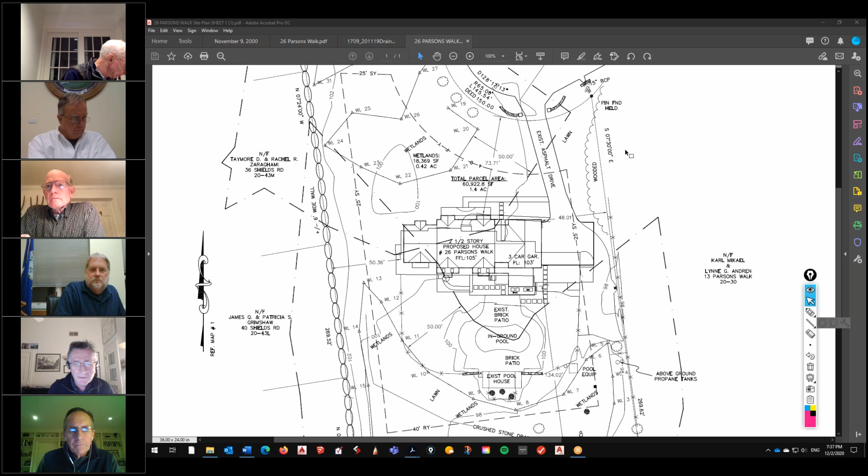I think I can. You're the new presenter. Okay. Can everybody see the screen? Okay, so I'll give you an overview.

Here is the site. It's at the end of the cul-de-sac at Parsons Walk. And here is the existing house. This is where the house is.

There is an existing pool and a pool house, about here, which we're going to keep. The wetlands are mainly here and also here.

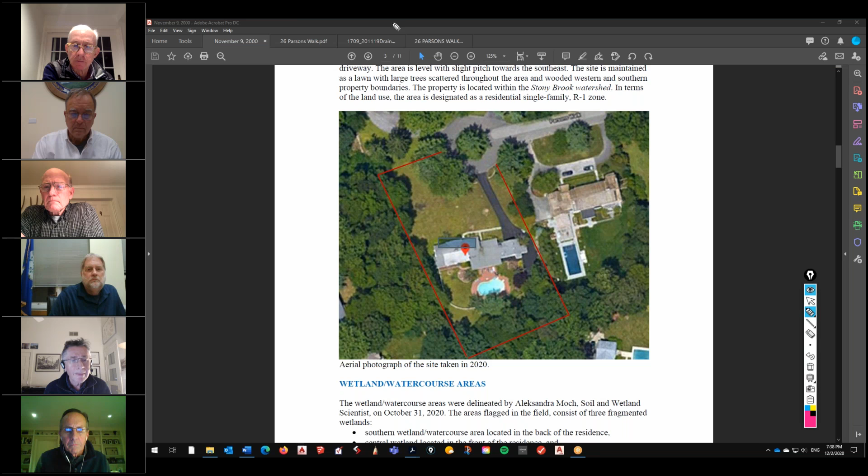Here is the view of the site and proposed house. It's basically a replacement house. I'll show you this, this actually shows it better.

So here is the edge of the wetlands, and here is the edge of the wetlands. With the offset at the 50-foot mark, this only leaves this area here, which is outside of the upland review area. So our proposed construction is mainly where the existing house is now. This is the existing house right here, kind of meandering like that. And our proposed house is just in the same vicinity, as you can sort of see it here, with a smaller footprint and smaller driveway.

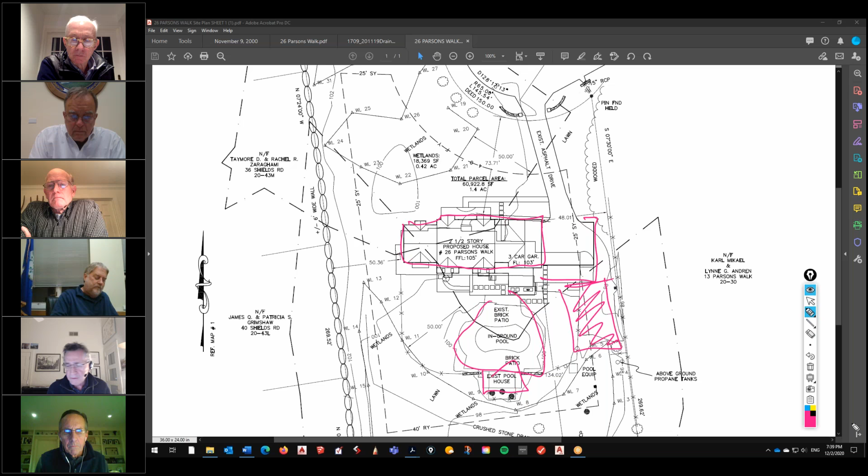There is an asphalt driveway here, which we're going to take out. We are going to keep the pool and the pool house. The drainage area for the proposed new house is going to be here in front of the house, and then behind, you can see it here and here. This is the proposed drainage.

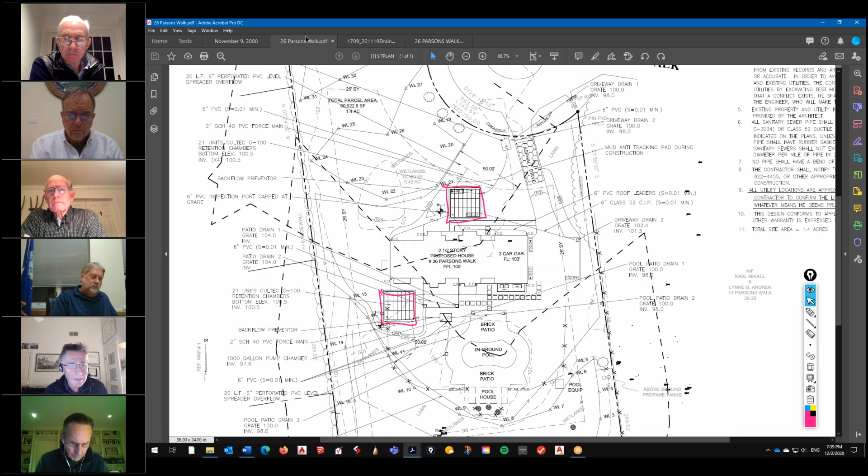In terms of mitigation, we have Alex, who's actually here in case you have any questions for her. But there is a report that I'm going to submit. This is the mitigation plan in terms of plantings—some plantings here in the front, here on the edge of the wetlands, and a little bit here and a little bit here.

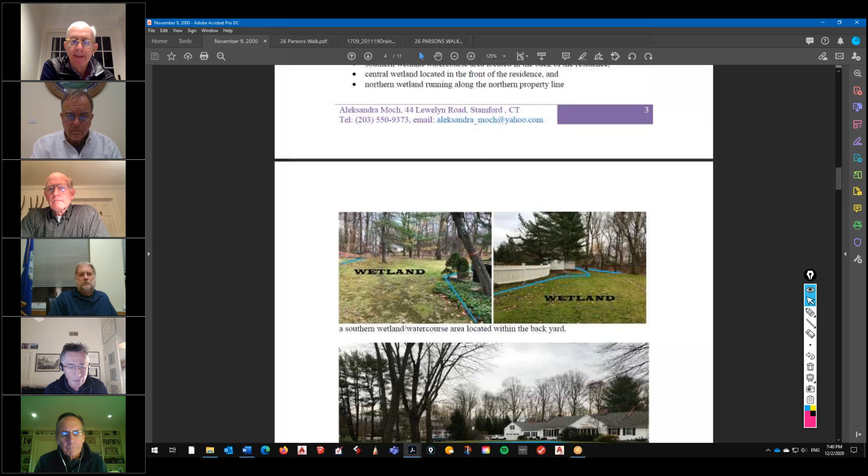This shows also a few pictures here on the site where the wetlands are. You can kind of see that this is not really much grass. There's mainly grass here in the front of the house—this is the existing house right there—and some of this here on the side.

And again, I'll have Alex at the hearing go over her report. The drainage design here was done by Wayne Davanzo, who's not here tonight, but he's going to be present at the hearing next, I guess in January.

I don't know if you have any comments or questions. I'll be happy to spend more time—I was trying to be very, very brief.

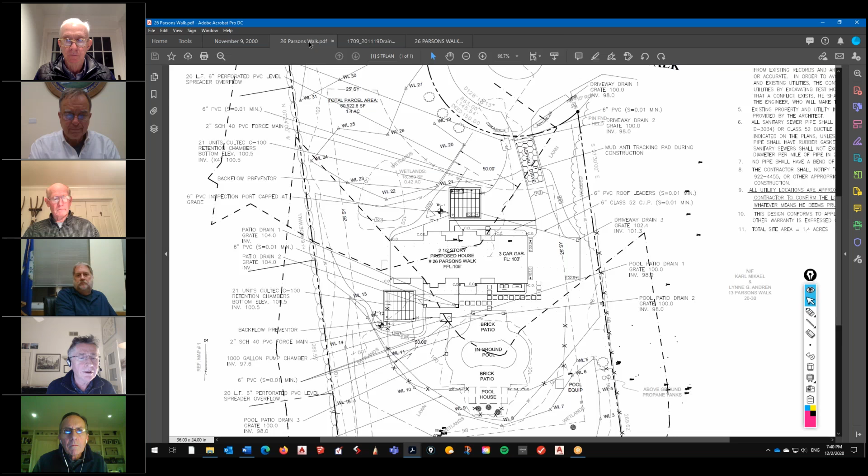Sure. During the meeting in January, you'll have run perc tests? Well, the perc tests have already been done. There is a—because of the design, you can actually see it. Here are the test holes, here, here.

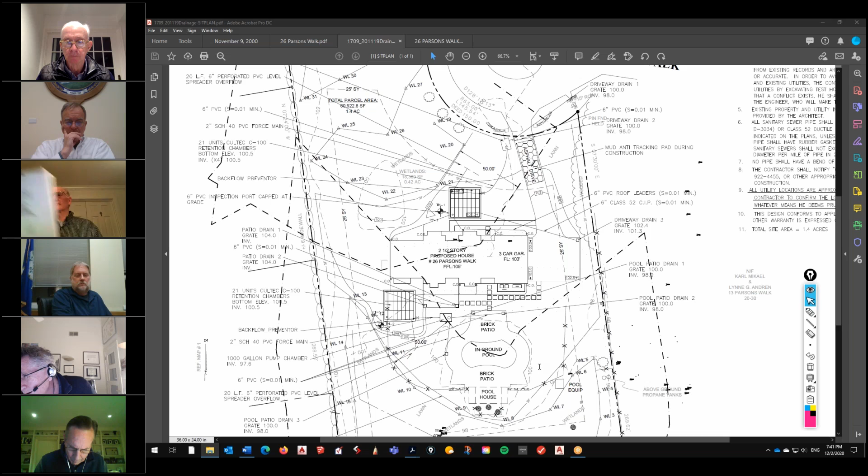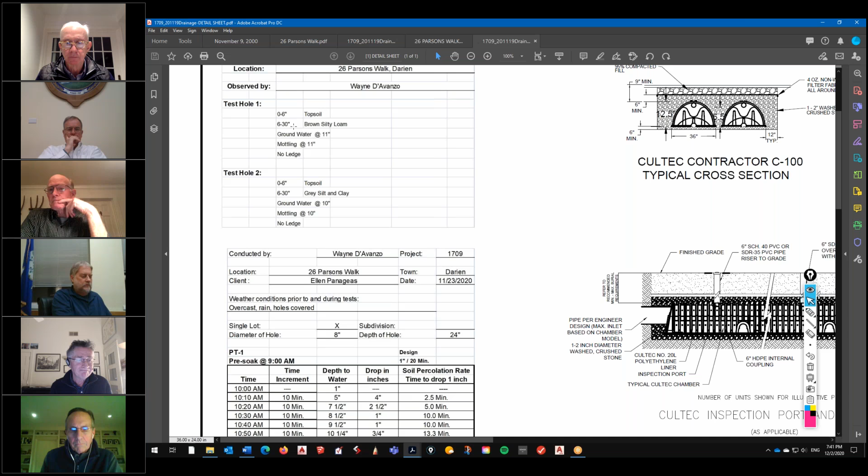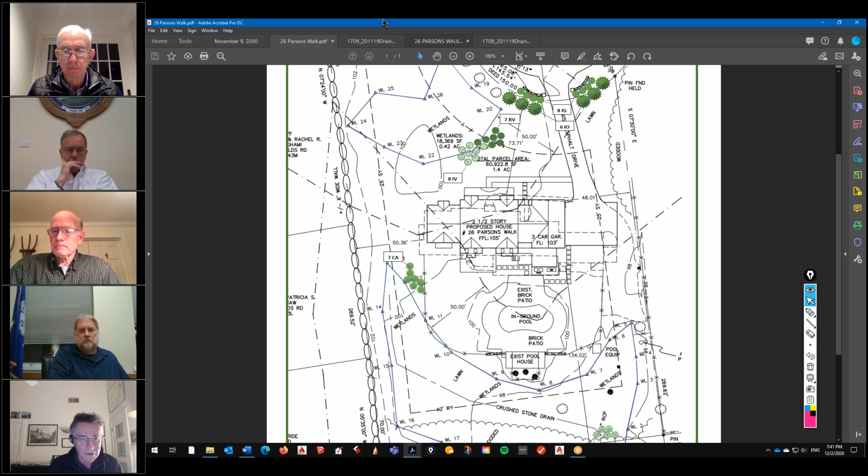And it's obviously going to be an improvement over what's already there, with what we're proposing: a smaller footprint, less impervious surface, some mitigation, and obviously proper drainage. Right now the house just empties water onto the lawn, which you can kind of see on some of these pictures—what's happening there.

So that's basically where we are right now, and we can spend more time on this when we come back in January.

Okay, because my question in general will be about the basement—how deep is the basement? What do you do, some pumps, the whole thing? So you don't have to answer it tonight, but that'll be guaranteed—I'll be asking that. Yes, no, I understand.

And we've been preparing the owner for that possibility. Obviously, they would like to have a full basement. I have been advising that perhaps we should think about it.

We have to go, by code, 42 inches below the frost line, which will put the footings about 4 feet down below grade at the bottom of the footing. So very often it becomes a question of what do we do with the crawl space—crawl spaces are not energy efficient. If possible, it's best practice not to have crawl spaces unless we can.

Slab on grade is something that we don't really do around here. So it's either a full basement or a crawl space as the option. And so we're still thinking about it, and obviously would like to come to some kind of a solution.

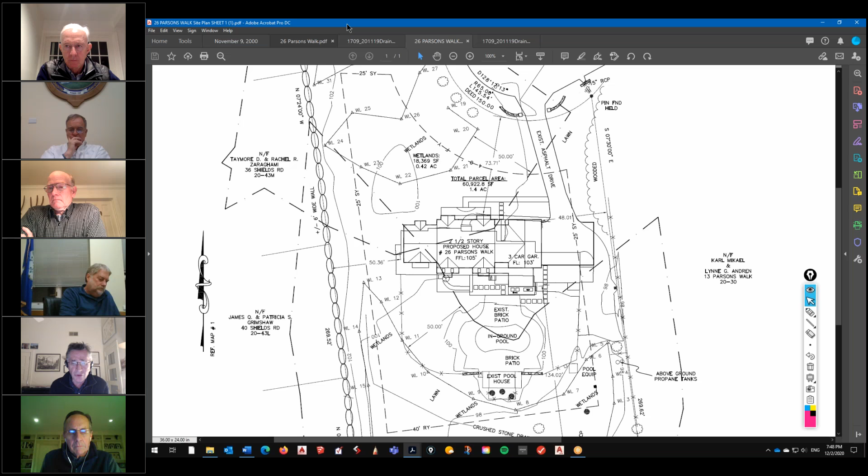Well, definitely, I think on the water you also have tidal forces to think about, so the water might go up and down, and if anything, doing a slab on grade might be a better choice here. I don't think we have that problem, but yeah, doing maybe a partial basement, some crawl space, or a combination. There's definitely going to be slab on grade on the garage, so then it's just a small portion.

As far as mechanicals, I don't know if you recall, but we did two houses on Holly Lane, number 44 and number 10. Number 10 was actually within the floodplain, and we ended up going with a crawl space and floodgates, and we put all the mechanicals up in the attic on the third floor. That actually worked out very well.

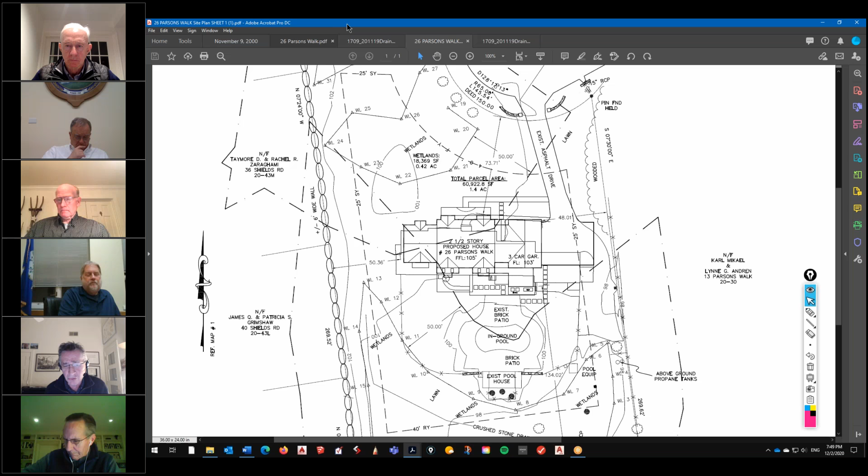And with today's technology, with gas-fired boilers which are very quiet, it was an easy thing to do. I think I would actually consider that in this house, just because if any of these pumps fail or something happens, the mechanical should be way up there rather than down in the basement. The basement should be only for storage, most likely—I don't think we'd even consider finishing it off.

I was just throwing that out there. I think it's interesting that people are doing some pretty cool stuff. Not to bore the commission with energy construction, but the amount of insulation you can stick in the ground before you pour the slab, and then on top of that, the average user wouldn't know the difference. Right, just throwing that out there. Anyways, well, thank you, appreciate that.

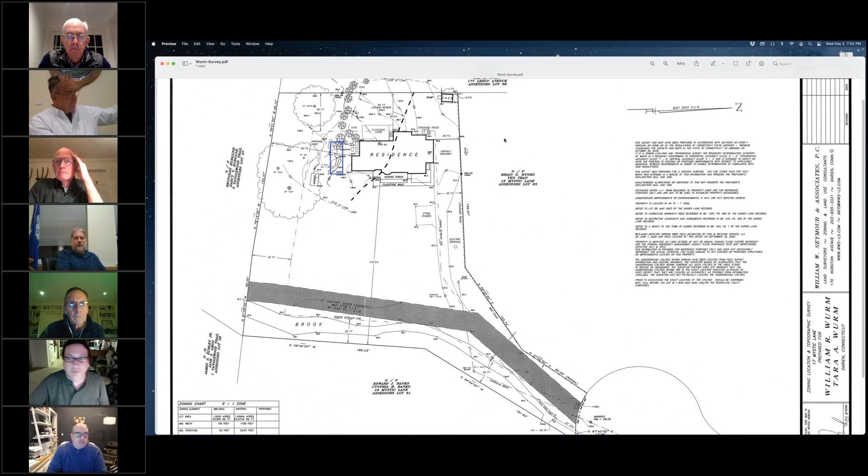As you know, the pool will be situated within the 50-foot upland review area, and part of what we're proposing will overlap or encroach into the wetlands themselves. So I'd like to call your attention to these two diagrams. Can you guys see my screen okay? Yes. Okay, I'd like to call your attention to these two diagrams.

This is LA1 or LA100, and this is drawings 2 and 3, showing both existing and proposed coverage types and areas respectively. Drawing 2 shows the existing wetland coverage diagram. Within the boundary of proposed work, we have roughly 87% coverage of unfavorable existing features such as planted lawn — this revision cloud outline is the existing planted lawn, which was planted, as far as we know, when the house was built, prior to today's regulations. So this area has always been planted lawn relative to the age of the structure.

So 87% of the work we're proposing within the boundary of work is either existing planted lawn or invasive species. I understand the board members had an opportunity to go out and see the flagged location of the pool, where hopefully you observed that some flagging wasn't possible in this area because of existing multiflora rose shrubs, a fairly robust stand of them, which we're proposing to rip out along with the planted lawn and replace with the pool.

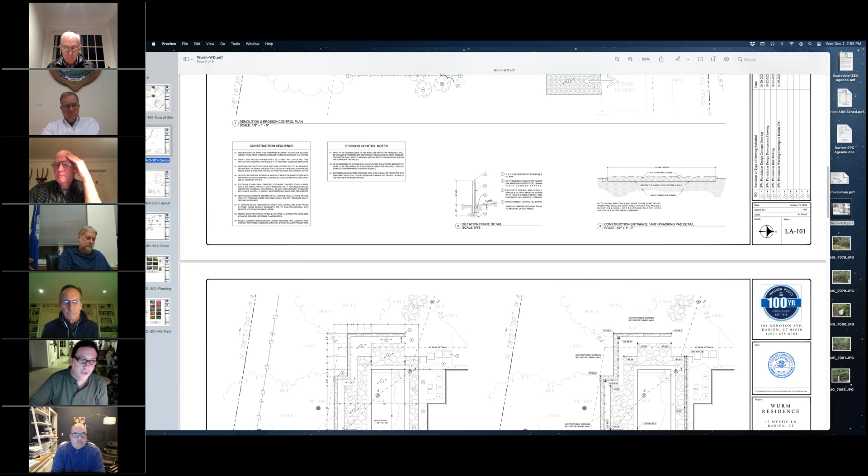I'd also like to mention — I'll skip ahead to the fencing plan. The owners have advised that there's a wildlife corridor on this end of their property, and they did not want to bring the fence all the way to the property line. They want to leave it in 10 feet, as have the neighboring abutters on this side, leaving an access for deer and wildlife and not blocking or creating an impasse. So I thought that was a nice point.

The patio that we're proposing is a dry-laid random fieldstone on stone dust. We also have a drainage plan with catch basins. This perimeter retaining wall is required in order to level back and create a terraced area for the pool. The pool is only 15 by 35 square feet, so a very small patio area.

As I mentioned, it's dry-laid, and we've got a Cultec recharger that we're proposing, along with a curtain drain between the house and all the proposed work. So we're proposing to capture and mitigate any runoff that would be pursuant to the proposed work.

Also, with the smaller pool size, we're not going to be as deep, 6.5 feet, as opposed to a traditional 8 or 8.5 feet. That means less excavating, less disturbance, less environmental impact. The pool is also located as close to the house as we can get it. So in that regard, we've done everything we can to minimize environmental impact, and we hope the board will favorably regard our proposal for this small pool.

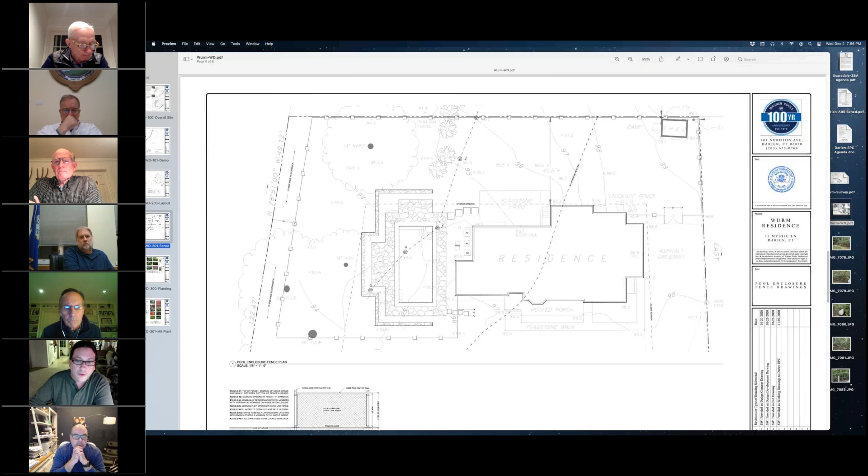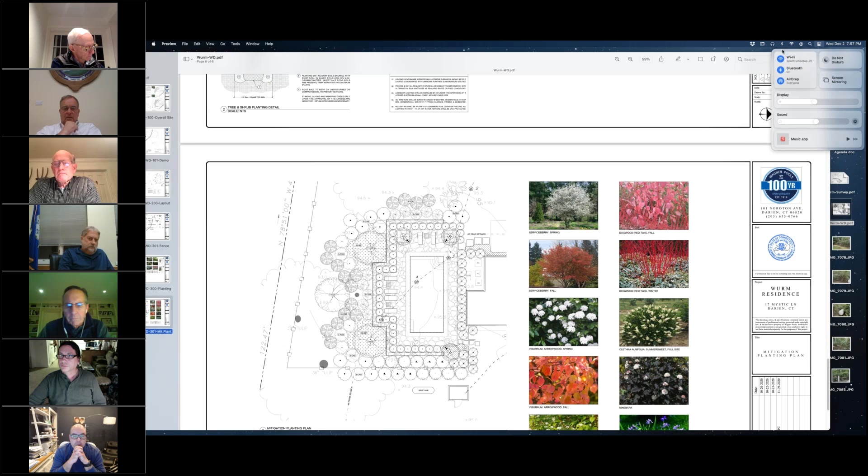Okay, let's open it up to the members of the commission. Bill, I'll start with you—do you want to have questions and comments? Yeah, so I understand what you're doing there.

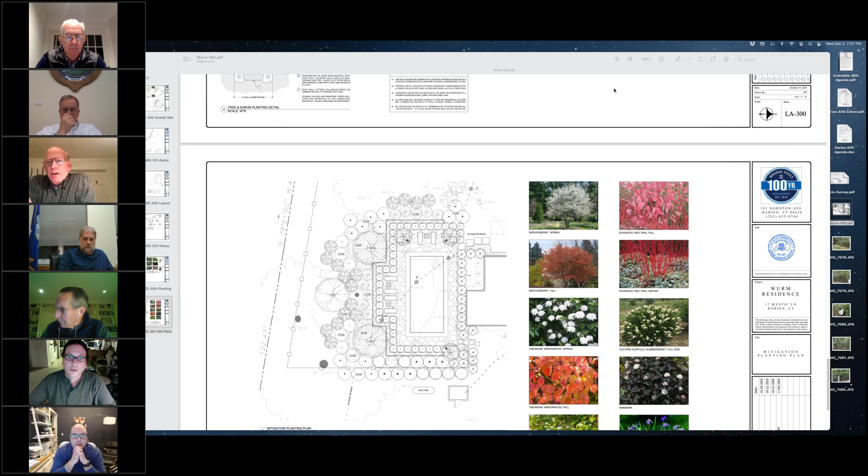I had a few questions though regarding the rain garden there that failed. I'm curious, was that rain garden part of some requirement from another project? And if so, why did it fail? I'm just trying to learn a little bit about what that was all about.

You know, my understanding, I don't know a lot about it. I know that the rain garden was engineered, and it absolutely failed. We've got the wrong species of plants in there—hostas, rhododendrons, azaleas, everything that you would not want to put in a rain garden was in there. I wish I could give you more information on what the purpose of that was. But the other thing to consider is, as we know now anyway, a rain garden doesn't really work well in a low-lying area or in wetlands themselves. They would want to be located further upland in a drier area with soils that drain well.

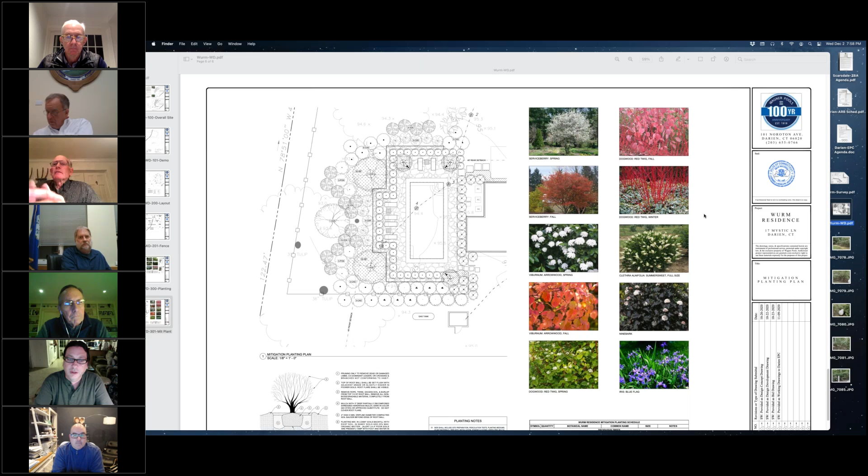Okay, so I think the intent was good. Whoever put it in was well-meaning, but as you know, our understanding of how these things work has increased in recent years, and it's better to funnel everything into the Cultec recharger, which we're proposing further uphill.

Okay, another question too. I'm looking at the wetland line on the plans, and it seems to just dead-end when it's going down to the south—right, this area here. Is it actually dead-ending there? I mean, there's no more wetlands continuing on further through? It was the extent of the flagging that had been provided at the point in time when I was brought into the project.

Prior to my involvement, there was another woman, I believe a landscape architect, who was involved with the project, and I stepped in. This was the extent of the flagging. I had discussed it with Mark Lebo from Williams, and my recommendation is they should probably make that accurate when doing these things, rather than just leave us hanging there.

Understood. There was also a sump pump that was active when I walked out there—by the way, it was very wet when I visited a couple days ago. Luckily I had boots on. The whole area that was flagged was extremely wet, but there was also a sump pump pumping out that I didn't see on the plans either.

That was pumping out into the wetland area, from the side of the house. It was closer to where that ash tree is, not way back where the rain garden was. But again, it's just an item that's not on there—it'd be nice for people to see. Yeah, there's a black PVC pipe, about 1.25 inches, that goes out into the wetlands. So yeah, it was flowing.

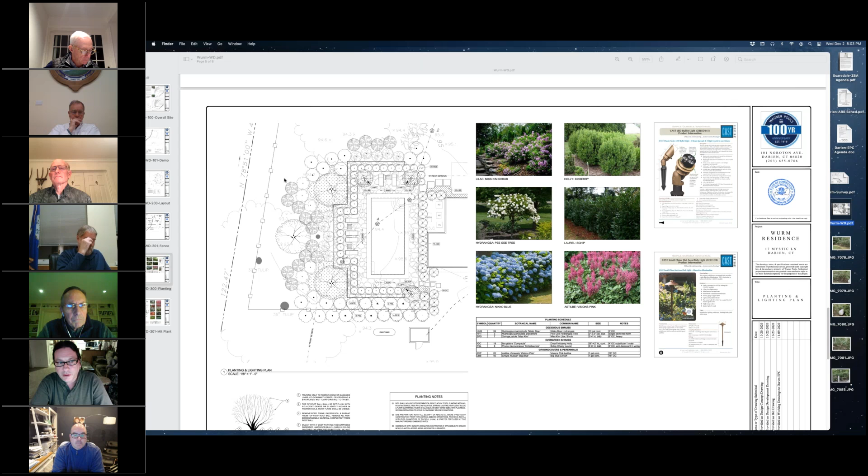What we're going to try to do is provide various different types of plants that all thrive in the wetlands—some will do better, some will not. These circles don't represent the holes that are going to be dug; the holes are much smaller, much more shallow. I'd argue the most disturbance would be the tighter-placed perennials underneath the Amelanchier trees, and the blue flag irises, because you're disturbing a wider area—but it's more extensive as opposed to intensive. It's a wider area, but not a deeper area.

So I agree with you, there is some disturbance in there, but this is foot traffic, people digging with hand implements, and the same for the fence—as we pass through the wetlands, a fence can be installed with a post hole digger, no problem. Okay, I'm done, thank you. You're welcome.

Eric, I'm finished. Okay, Michael Urban? Anything? Michael, okay, I do.

I guess I could be comfortable with this knowing that the pool is greater than 100 feet from the brook. My observation is that the planting plan is around the pool, and understanding that there could be more detriment to the upland review area by keeping a lawn and fertilizing it, which then runs off into the brook. But I guess I'm looking for some mitigation along the bank of the brook.

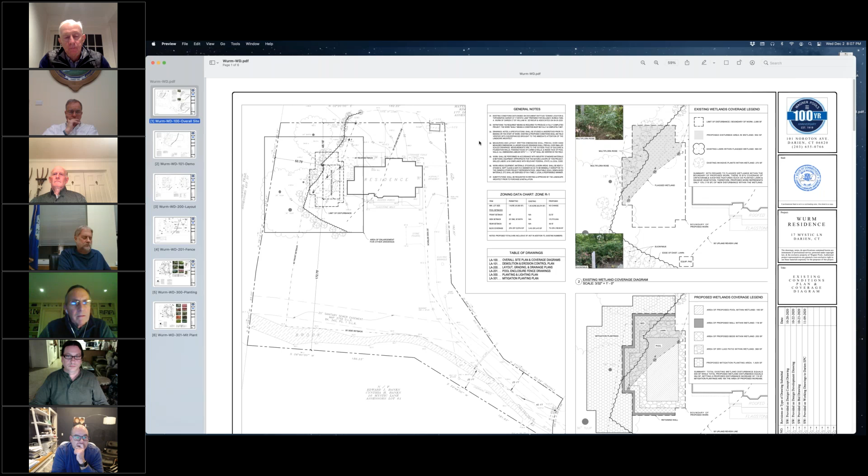Okay, I have a few questions. Material storage, you're obviously going to need heavy duty equipment to dig out the pool. I know Wagner Pools has a plan, but is that going to come through the front, or go through the back? What's your plan?

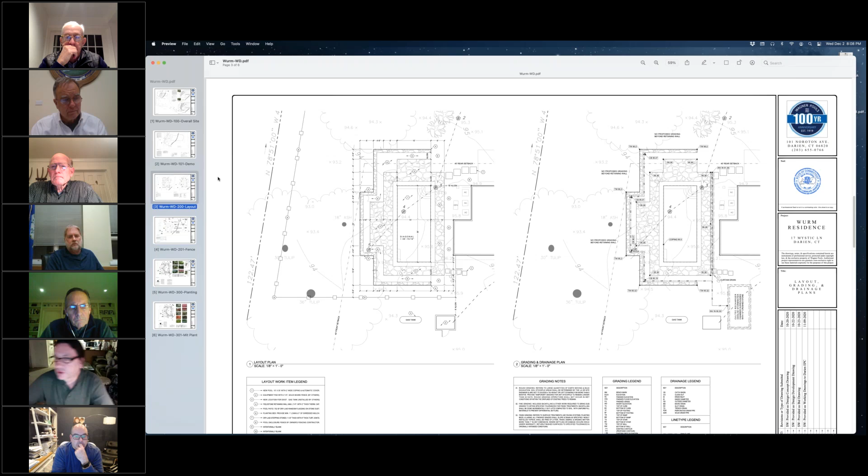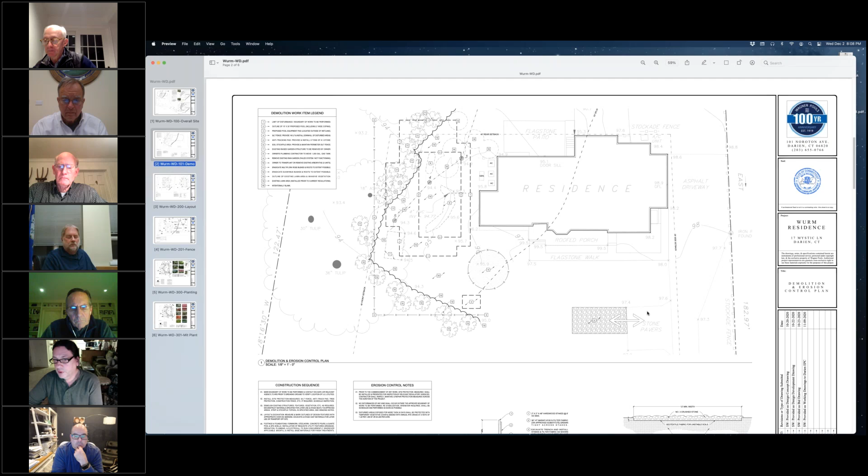A good question. So this is the existing driveway. Let me back out a little bit. The road is up here, and they're going to come up the driveway. Over here you have what's actually a nice feature, what we call turf pavers, a honeycomb matrix with cells that have turf growing in them. It's a sustainable sort of thing. It's drawn here as stone pavers with grass between them, but it's really that turf paver system. Since this gives us a head start into the lawn area, we're proposing to use this as the construction entrance, staging materials at the lower part, driving in to get our soil stockpile as close to this area as possible, so the dump truck can drive up, back in, and the loader can bring material the short span from the stockpile to the waiting truck. I hope that makes sense.

So there are three outstanding items, Rich. One was to complete the wetlands delineation, which we need for the town maps because of adjacent properties. Another is addressing the sump issue — I don't know how he's going to solve it, but he's going to solve it. And the third is the mitigation planting in the brook. The wetlands delineation could be handled by staff, and the mitigation planting in the brook can be handled similarly. We can see that at the next meeting, but solving the sump pump is it.

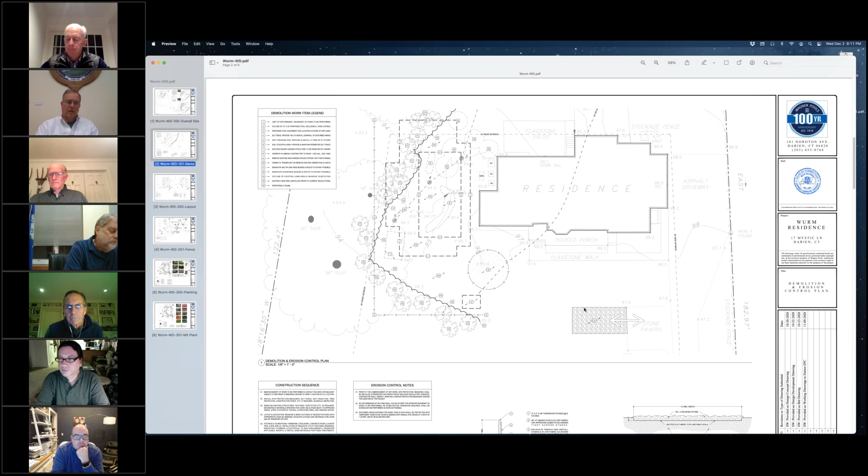Mr. Chairman, I apologize if this is repetitive — was it specified how the stockpile and the anti-tracking pad were going to be protected from the brook, e.g. wattles, silt fencing, hay bales, etc.? The brook is 150 feet away. We're happy to put hay bales in if you think it's necessary. We can do a double silt fence, hay bales, go the whole nine yards — whatever you guys think.

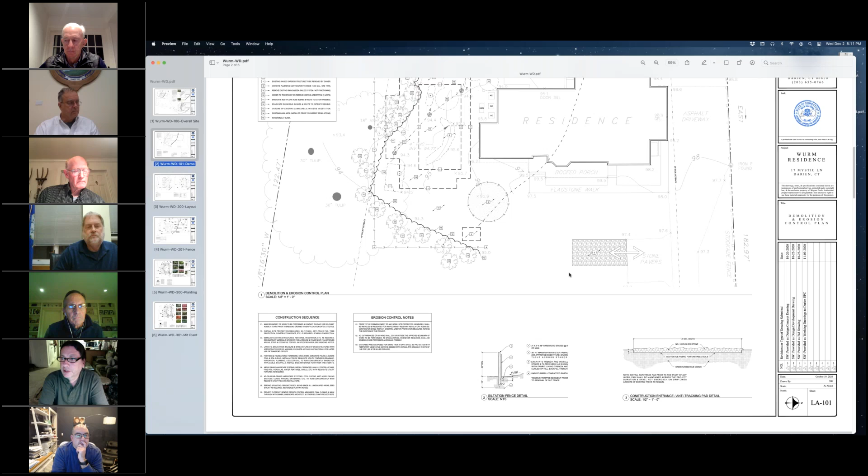Honestly, my thought process is some demarcation so the truck finds its way to the pad and the excavators sit where they're supposed to, not using the open space adjacent to the brook. This wouldn't be the first time an application had excavation equipment go places it wasn't supposed to be. And more specifically, we've seen examples where excavation equipment just drove over all the sedimentation controls. So that's my two cents.

So normally we would suggest a construction fence, but because of the wetlands and the brook, like you said, why not, if we're going to go through the trouble, install a silt fence there as well to demarcate the construction area, the staging area, and to ensure that nobody passes through it. Keep everything contained, so that in the off chance we have a driver or subcontractor who comes in and doesn't fully understand the situation, they're pretty much forced to stay in that area.

Okay, so maybe that makes that another thing to put in there.

Okay, I'd like you to open up. Is there any member of the public that would like to speak? Anybody?

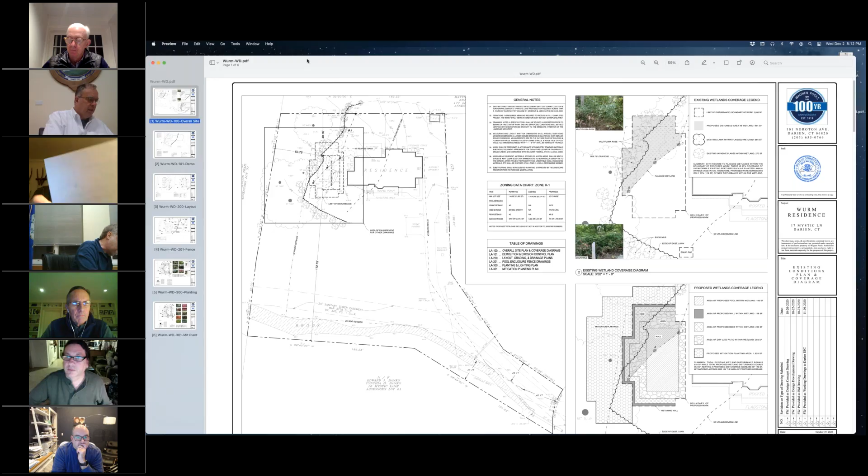Okay. Hello? Can I just ask a quick question? Sure. Sorry, this is Susan Hearn. Maybe I dialed into the wrong meeting, or maybe I missed it. I was calling in to see, I thought there was a meeting about the construction on 16 Oxridge Lane. That's next, we're going to start that immediately. Oh, okay, sorry about that. Okay, thank you. Yes, ma'am.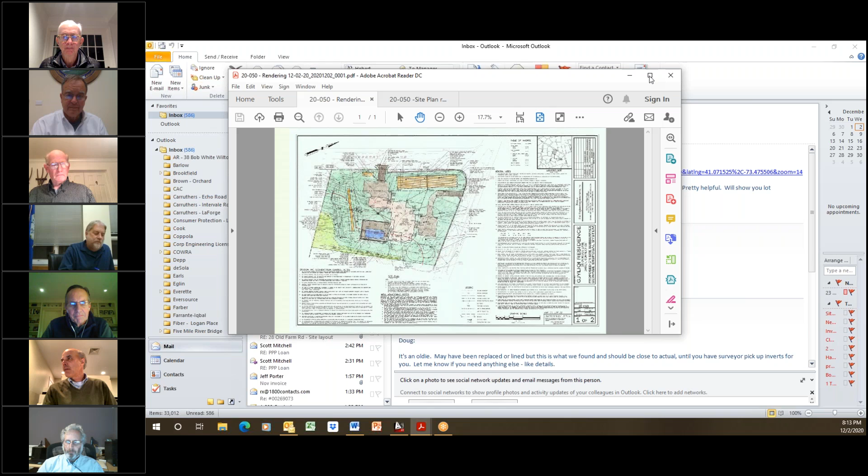Okay. Appropriately, the next item of business is EPC 29-2020 VB, Ijaliki at 16 Oxridge Lane, proposing grading activity related to a replacement house within an upland review area. This site is shown on Assessor's Map number 7 as lot number 22. Please forgive me for my pronunciation of your last name. Okay, is someone here to represent the applicant? I am Eric. This is Doug DeVesta, representing the applicant. Let's get everything up here.

Okay, good evening. My name is Doug DeVesta, professional engineer, representing the applicant. The project, as Eric mentioned, is at 16 Oxridge Lane on the corner, the south and east corner of Blueberry Lane and Ox Ridge. The property is approximately 1.5 acres, located in the R2 zone. The property slopes from the east towards the west, towards Blueberry Lane. There was an existing house located in the central portion of the property, and there's a stable on the southern portion of the property where my cursor is right now.

We are looking to remove the existing house, which has already been removed if you pop it out there, and then construct a new residence in the same general location of the property. The property was checked for wetlands in 2018 for the previous owners by Steve Danzer, who's on this meeting as well. There was some confusion about the property lines, so wetlands were not marked on the southeast portion of the property. Since our last meeting, we had Steve go back out there and check for wetlands. He found wetlands along the southeast corner of the property and along a ditch that was dug along the easterly property lines. Steve will go into more detail about his findings.

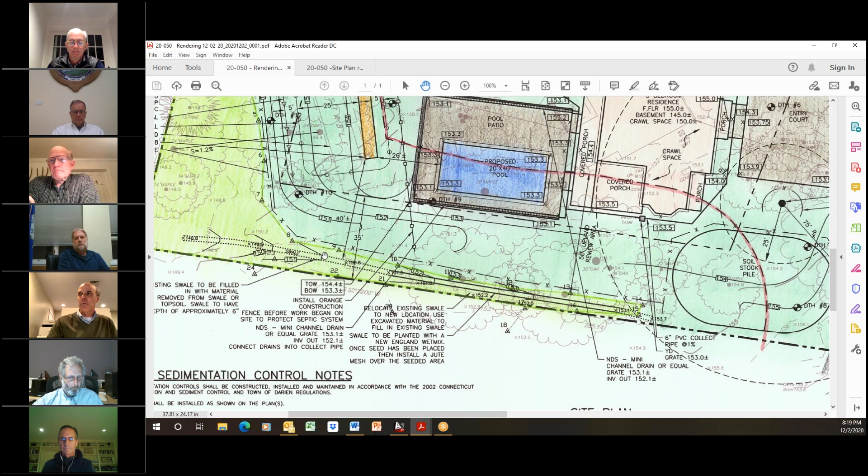Plant this area with a New England wet meadow mix, and then put a jute mesh over for erosion control until the grasses and plants take in that area. So again, that's something we're proposing to straighten out this swale and make it much shallower than it is right now, but keep it in there and mitigate it back up to a more viable wetlands than what's out there right now.

So again, we're looking at putting a new house in the general location of the existing one, a new pool, a new septic system, and a stormwater management system.

Stormwater was checked for the 2 through 100, or 2, 10, 25, and 50-year design storms, and we show a 0 increase in runoff in the general location on the south, north, and west portion of the property. For erosion control, we're looking at silt fence down gradient of any cut areas and along the edge of the wetlands along the south property and along the existing ditch on the easterly portion of the property. Stockpile area would be on the north and east portion of the property.

There will be a new well being drilled for the property as well. Anti-tracking pads on each of the existing or proposed driveways coming into the property.

With regards to Darren's comments dated 10/7 and 11/19, most of these were just statements and some comments in there. A few of the items that we would address by notes in the plan: any work within the town right-of-way will require a road opening permit. These two curb cuts are basically already existing, so we really don't need a curb cut there, but any utility work coming onto the property would have to get a permit from DPW.

Dr. Danzer will address the comments about the mottling that Darren mentioned in his comments with regards to the test holes that we dug on the property.

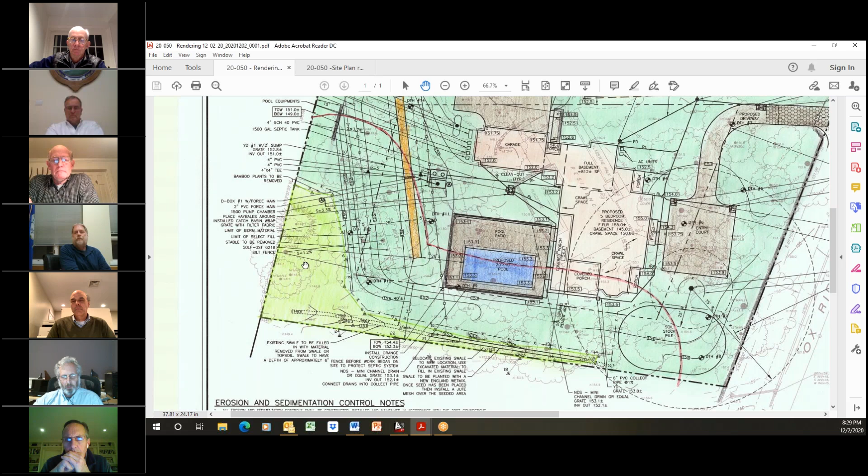But when you do wetland delineation, you're concerned about other factors besides mottling, such as the background or matrix soil. In all of the areas where I saw mottling, the background soil was not, to simplify it a little, gray enough for that mottling to qualify as a wetland indicator. So just because I saw mottling a couple inches down from the top of the soil surface, it did not qualify as a wetland. It's a little bit different. We soil scientists for wetland delineation look at it differently than the people that do test holes for drainage and septic.

Finally, the other thing that should be noted, which shouldn't be a surprise to anyone who was out at the site—maybe it's more difficult now because the site's been so disturbed—but that site has a long history of filling. They filled to put the paddock in, they filled the area in front of the yard. And when I did my soil sampling, I just did not find a pattern consistent enough to mark wetlands in any other parts. I'm not saying that if you dug down you might not find the odd hole that could qualify as a wetland test hole, but the key is one hole does not make a wetland. You need to find a pattern. And at least back in June 2018, I just could not find a pattern to lead me to believe at the time to mark out wetlands anywhere else on the site.

Now with the advent of the engineering, they have the ability to sink test holes wherever they want. They didn't have to go by hand. They could go below areas that were previously either impervious or semi-pervious. I did not have that option—I could only essentially dig at the time where the soils were soft in the forest. So anyway, that's my answer to the town engineering comments.

The third thing is I was asked—I guess it's assumed because I'm a wetland scientist I must know something about bamboo—but it happens that I actually do know a little bit about bamboo. I have been involved in bamboo removal projects in wetlands and out of wetlands. So I put together a quick outline of how I would propose a bamboo removal, and I put that at the end of my report.

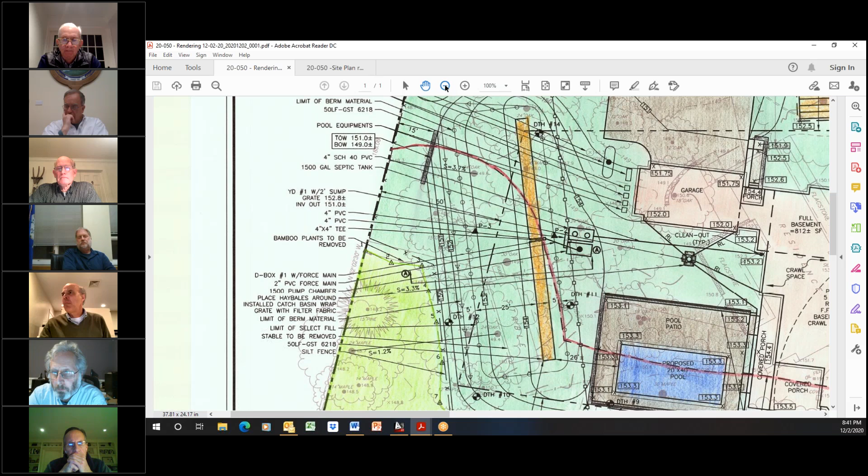Right, when I originally designed the septic system, it's in the same location as I had it before. I actually moved the system back about 5 feet, but the grading that I had proposed still wasn't past this one test hole, number 12, I think it is, right here. Yeah, number 12. It wasn't really past that area, so we really did not show any grading in this area. So again, I pushed everything back as far as I can relative to the septic and to every other setback I had to worry about.

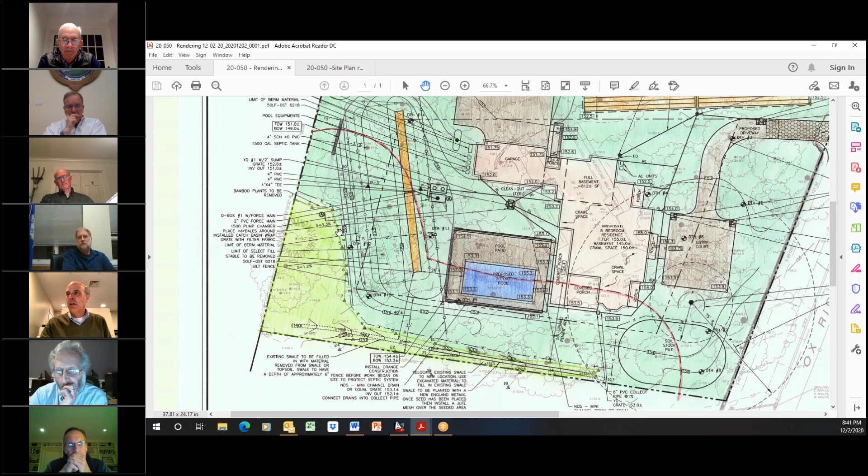So again, there's no grading going into the wetlands area, but we do have our silt fence along the toe of the slope in this area and along this swale. Obviously we'll have to do some work in this wetlands area to take that ditch that was excavated out and make it much more shallow, and mitigate that area to make it a more viable type of wetlands. And the area of the larger wetlands in the southeast corner here is natural and will stay in its natural state, except for some of the bamboo that Steve was mentioning, which we want to remove because it's an invasive material within that wetlands area. So again, any silt fence along the edge of the wetlands will protect that area. It's a fairly flat area, and really there won't be that much runoff going into that area.

And also we're proposing a construction fence on the north side of the proposed septic area to keep any construction equipment off that septic area, to preserve it as much as possible before they start doing any work on that septic area. Again, silt fence along the border of the wetlands itself.

Okay, Rich, the applicant has said that he's a builder in town, and obviously his interest is in building and then selling the house. How can I guarantee that, because I think Mr. Danzer's plan of getting rid of the bamboo and restoring the wetland, et cetera, is a good one. How can I guarantee that the next purchaser of the property will do the same?

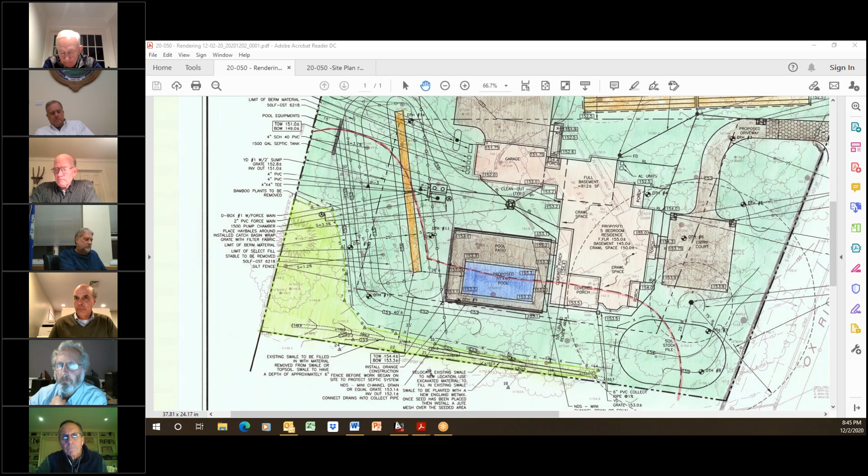So one, based on testimony, I would suggest we double up on the silt fencing, hay bales, construction fencing, so there's no future confusion as to where the wetlands are and the work that should not be completed within that area.

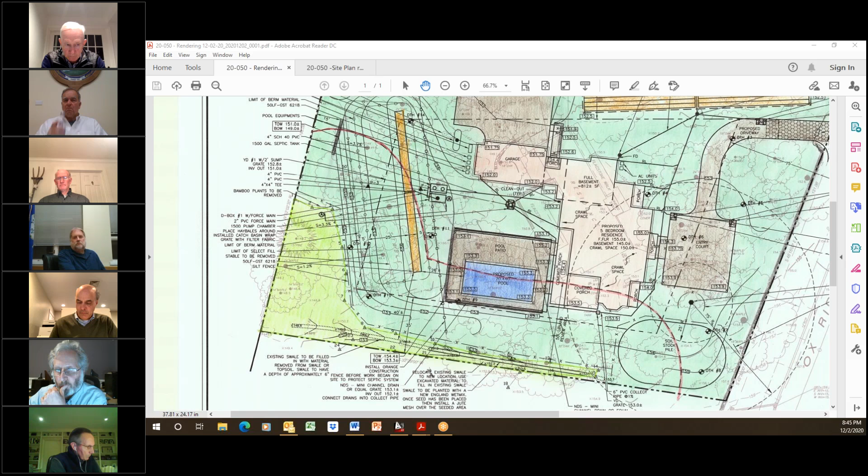So that's one. Two is, should there be a performance bond in place as it relates to the history on this? It's very common that applicants submit performance bonds for germane work, and I think this would be a great example as to why we use performance bonds.

And thirdly, again based on the history of construction without following the approvals, and common knowledge - I apologize if this is repetitive - but any damage currently in place should be remediated and returned to the original condition to the satisfaction of the commission. I don't want to say to the extreme before any future construction continues, but full stop, fix the problem, and then continue on with the rest of your construction.

That would be reasonable. Not suggesting it be punitive, but certainly addressed immediately and to the satisfaction of the commission. That should be the builder's foremost priority. Those are all my comments.

Can I ask a question there, Michael? What damage are you referring to? Well, we're talking about the filling of the swale. That swale was there prior to our client buying the property. So, but we're requesting...

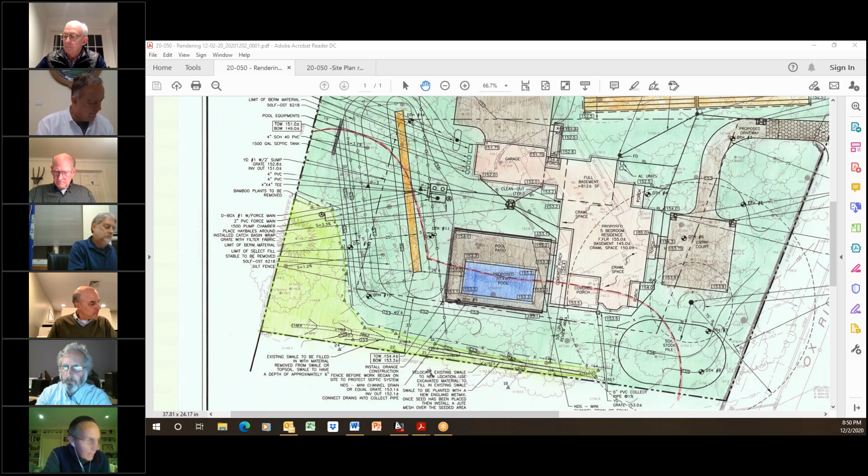Yes, I think I would like to propose we close the public hearing for EPC 29-2020 as discussed.

Okay, thank you. Susan, may I have a second? I second the motion. Thank you very much. Without objection, so moved.

Then we'll move on to the agent approvals.

Thank you, gentlemen and ladies. Have a good holiday. Yes, thank you, you too, Doug.

Thank you. Agent approvals: no action is necessary unless the commission receives an appeal of the approval within 15 days of the publication date per section 12.2 of the Inland Wetlands and Watercourses Regulations.

EPC 30-2020, Bob and Diane Weeks, 43 Stony Brook Road, proposing pool and patio construction in an upland review area. The site is shown on assessor's map number 19 as lot number 29.

Eric, for the record, it's 53 Stony Brook Road. Oh, 53, excuse me, thank you. No, that's wrong, I said it wrong. Called dyslexia.

Does any members of the commission have questions or comments for Rich? Please, I don't want to be the only one talking. Anybody else have comments before I talk? No? Okay, all right. So I'd like... it's a beautiful stream back there, and they do have a nice buffer between their yard and the stream.